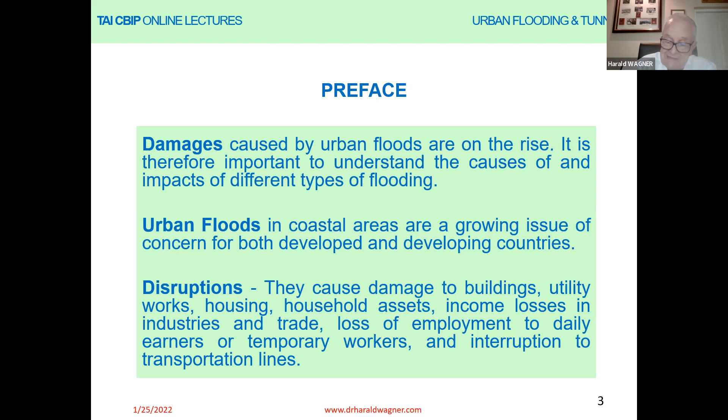That was an introductory note, and now I want to give you an overview of the content of today's online lecture, starting with some remarks on the largest city on our planet, and also how much oil production is influencing climate change. We all talk about climate change since the Paris Agreement in 2015, until 2021, when there was a big conference, almost 3 weeks, in Glasgow, Scotland.

Then I will talk about passengers and urban transport. I found a map of the cities which are in crisis in India, in crisis because of urban flooding, and its causes. Then I will go to one of the key experiences which I made here in Bangkok in the 2011 flood, which has affected Thailand.

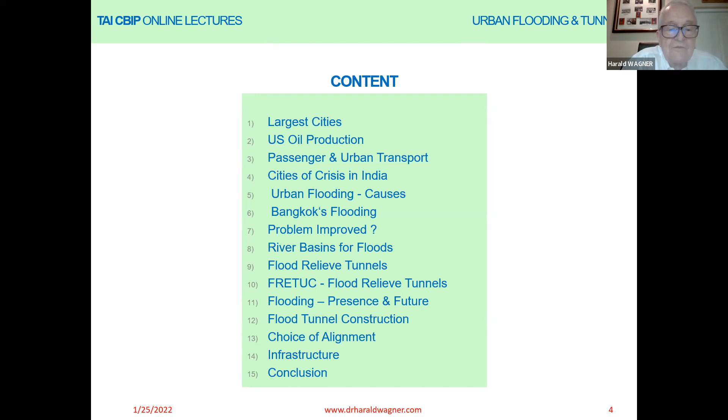Then I will talk in general about infrastructure, as flood tunnels and flood control in general are part of the infrastructure, and come up with some conclusions.

Now, if we take a look at the largest cities and urban agglomerations worldwide, we can see extremely growing populations in urban areas. Number one is Tokyo with almost 40 million people, then Delhi with some 25 million, Shanghai in China with 23 million, Mexico City with 21 million, almost the same as Sao Paulo in Brazil. Mumbai is also slightly over 21 million, like Osaka with 20 million, Beijing 20 million, New York with almost 19 million, and Cairo in Egypt with 18.5 million people. So these are the largest cities in the world, and also the largest areas with regard to growing urban population.

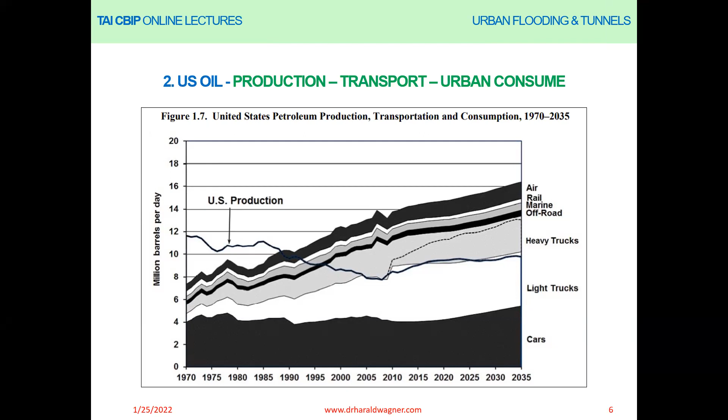So this is an overview where we can see how much this consumption has been affected in an urban context in the United States from transportation and consumption between 1970 and 2035, which is an extrapolation. We can go to the next slide.

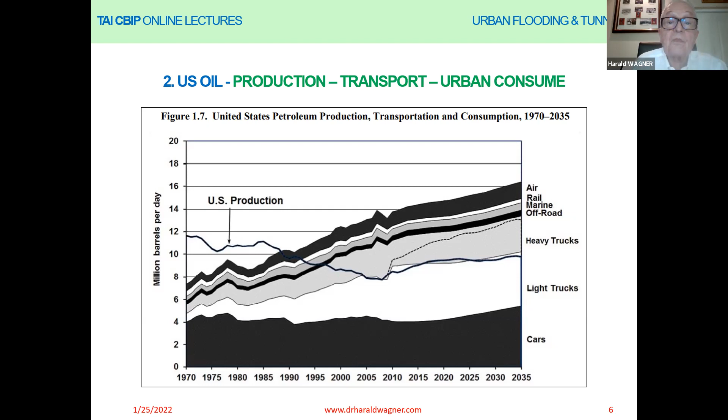The next slide gives us an idea about different types of traffic in urban transport and passengers per hour related to a 3.5 meter wide lane in the city.

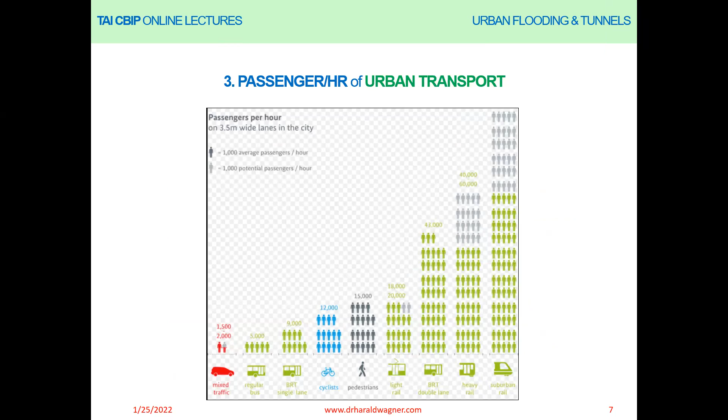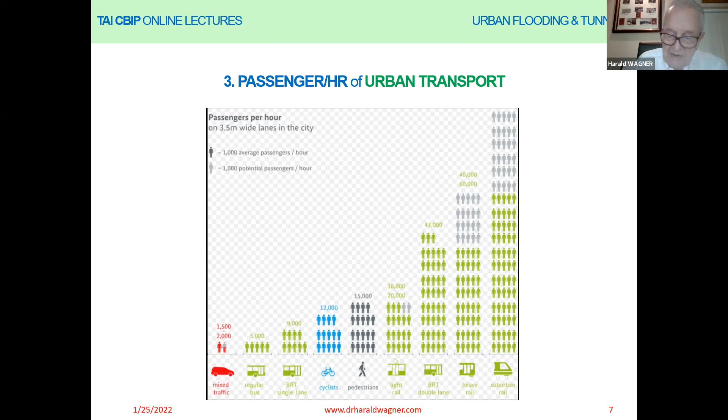We can see that suburban rail systems have increased most, with heavy rail between 40 and 60,000 passengers per hour, along with light rail, pedestrians and cyclists, and also mixed traffic, making up quite a heavy portion of the passengers per hour in our cities.

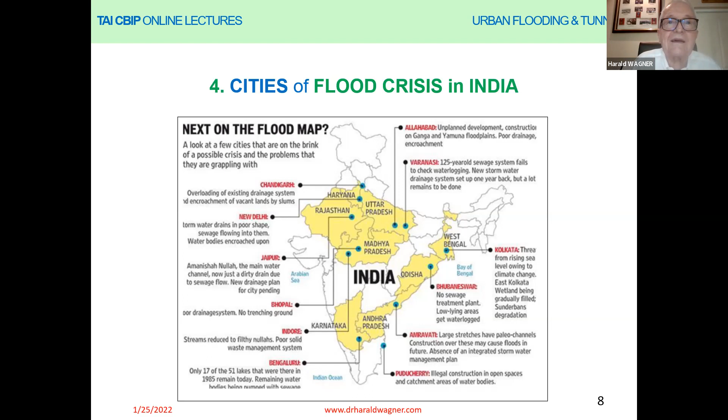We definitely have to understand what General Suresh Sharma said, that this is not a single place - it is a subject and a problem to be tackled on a much greater scale. Therefore there is definitely a need for more and deepening understanding and engineering, and this idea to go deeper and make another presentation is really a very good idea.

Now, what are the causes of urban floods? Urban floods have direct factors and indirect factors as causes. Part of the direct factors are climate change, change in weather patterns, and heavy rainfall. But urbanization is also a direct factor, with developments encroaching on floodplains and causing loss of natural storage, continued development and redevelopment to higher density land uses, and increased impervious areas such as roads, roofs, paving, and asphalt due to increasing development densities, which means more runoff.

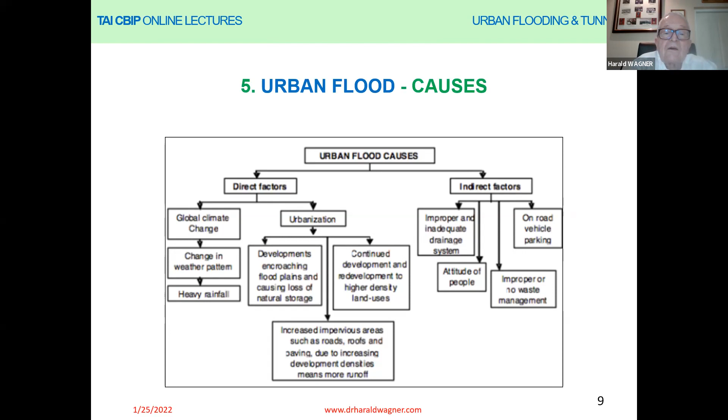Then we have indirect factors, with improper, inadequate drainage systems and on-road vehicle parking, which is another obstacle. There's also the attitude of the people and improper or no waste management, which is also a kind of indirect factor causing urban floods.

So when we go to the Bangkok flooding in 2017, Bangkok was hit heavily by heavy rain. The question is whether Bangkok will see major floods again or not. Despite horrible experiences in 2011, the city and country remain vulnerable to floods. So the question is also, who is to blame for that? Is it the people's garbage clogging the drainage system? We know this is a big problem. Is it the inefficiency of administrations?

Giant tunnels are drainage tunnels which are in construction or in preparation for construction. Some of them are being built, offering a sort of reservoir in the urban part of Bangkok, similar to what we have seen in Tokyo or in Chicago, where city administrations have been providing underground reservoirs and then managing these storage systems. Is this management responsible, and is this management going to be blamed?

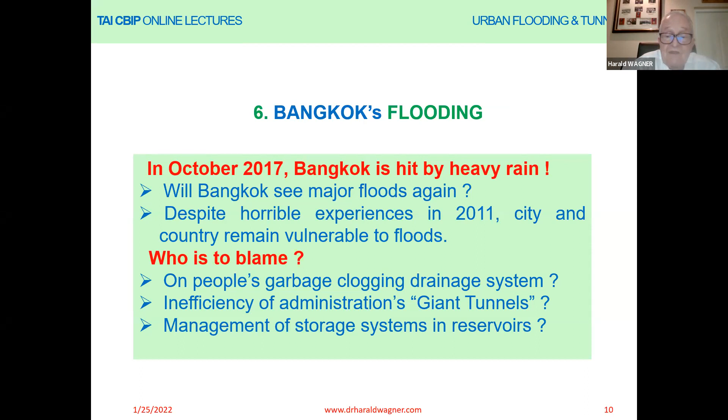This shows the actual situation in Bangkok in 2011 with urban flooding. You can see here that except the bridges, where people have been putting their cars to park, because Bangkok was not only flooded, but Bangkok was sinking also because of the flood. So this was a big problem, and this big problem still is not sufficiently tackled.

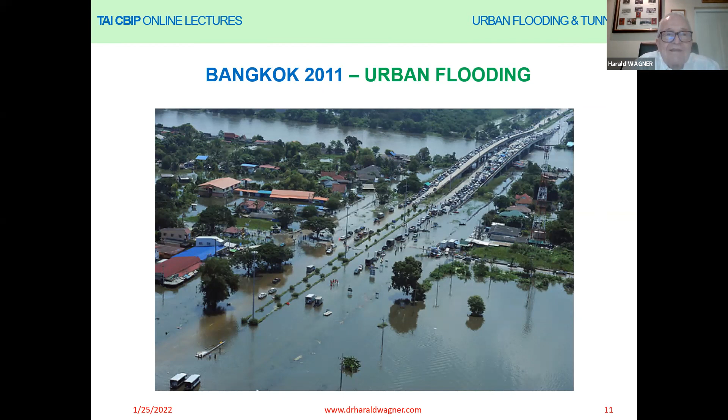So the question is, has the problem improved in the meantime? If we look at the cost of floods in 2011, it exceeded $47 billion. The question also is, why would the 2011 flood not be repeated in 2022? And what is the response of the Royal Irrigation Department? The Royal Irrigation Department handles these problems and deals with all irrigation issues in Thailand. The whole country is under control of the so-called RID, Royal Irrigation Department.

So what happens when the large-scale reservoirs are full? What happens if they are not full? The water runoff in Nakhon Sawan was 43% less in 2021 than in 2011. And in 2021, the accumulated rainfall was also less than in 2011. This gives the Royal Irrigation Department some comfortable feeling, telling the population, don't worry, we don't have this serious problem right now because of the runoff of the Nakhon Sawan River, and also because of less rainfall.

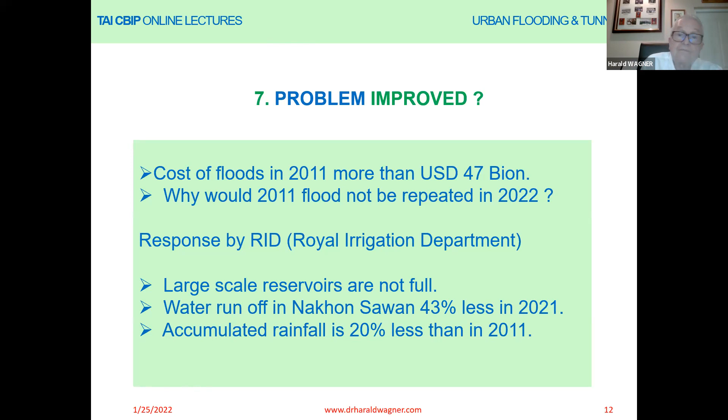So if we make a flood review and analysis, we have to state that there is hardship and damage during the prolonged and widespread deluge, followed by seemingly long-term and sustainable grand elaborated plans and proposals. There are various views of the problem. First of all, there is less natural disaster right now than there has been. It is more a case of mismanaged water resources.

Another view is that numerous prescriptions of what should be done exist, but are not followed, even though they exist on paper. Then there are committees to study solutions and develop recommendations for the various aspects of the problem. There are also ambitious ideas, for instance new floodways, dredging canals, and so on. And there are streamlining laws and agencies for water management, which are involved and responsible for floods.

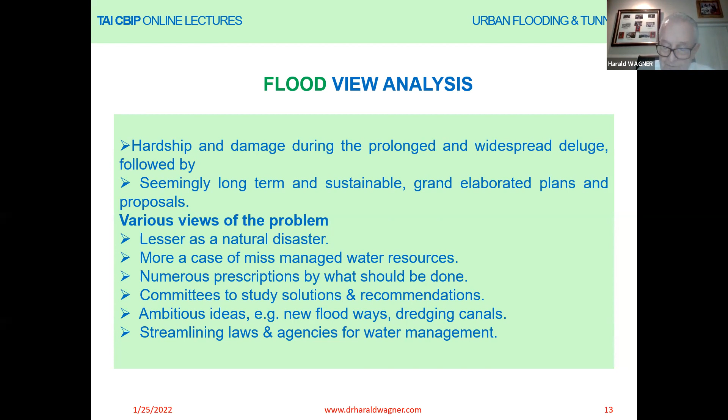So how do we protect against flooding? In this picture, you can see an activist from the community in the flooded Chatuchak district in Bangkok, who set up a large barrier of sandbags along with pumps in an attempt to protect the Moo Baan Kredkaew housing development from being inundated in 2011.

We have seen last year in Germany also huge floods in the summertime, and even in highly developed Germany, sandbags have been the immediate assistance or immediate help to get a little bit of improvement on the problem.

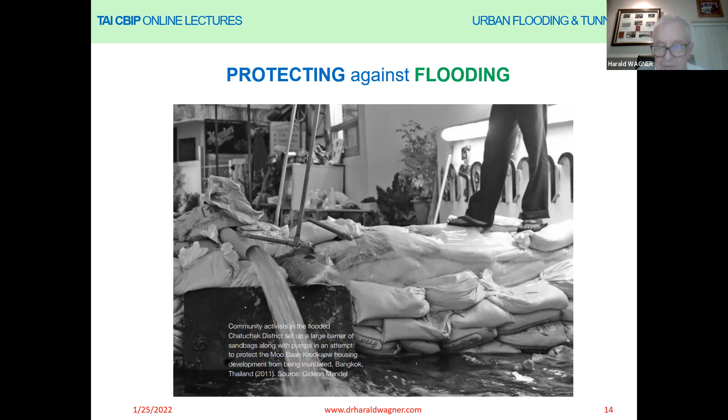There are attempts to establish a floodwater research institute, which should become an authority to manage water resources, embedded in some 50 different laws and involving 30 state agencies and 7 ministries. None of the laws authorizes diverting water for different usage. None deals really with flood management, even if it is called a Floodwater Institute. And there's a plan to set up a water ministry to consolidate all agencies, but this plan never got off the ground. So still, it is what is sometimes called a paper tiger.

There are other views of the problem, in particular doubts about the efficiency of the giant drainage tunnels, which are projects currently under construction here in Thailand. Then there are views also with regard to a proper flood warning system. This flood warning system may be something that is going to be improved and may give real help in regard to software development for flood warning systems, and with that may also help improve the flood warning installations, not only the systems but also the installation.

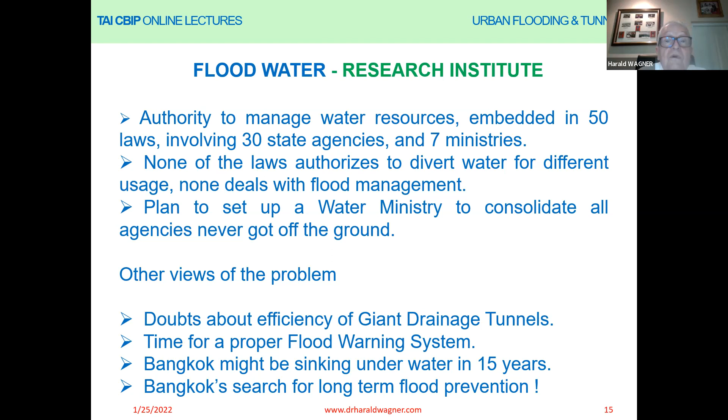Bangkok has had several severe floods. Just to mention the most recent ones, there was a severe flood in 1942 - that is almost 80 years ago. In 1983 and also in 1995, all of central Thailand has been flooded, in addition to 2011.

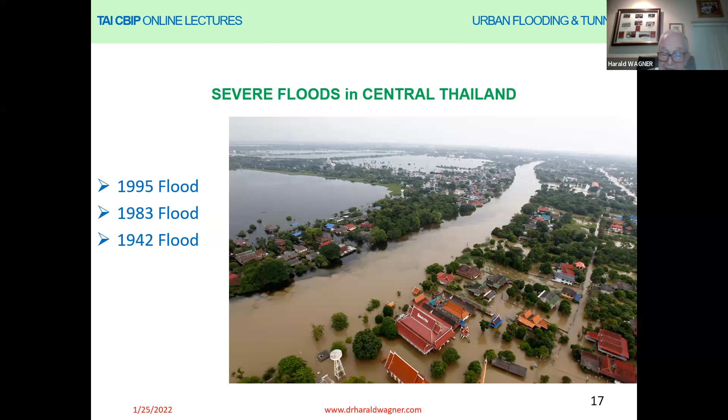When there is flooding, then there is also subsidence, and subsidence or settlement of structures must be controlled. This land subsidence in Greater Bangkok is witnessed by widespread exploitation of groundwater extraction, leading to significant land subsidence and damaging of urban infrastructure.

Another example of what you see here on the right side of this slide is the sinking of the roads. Lots of transportation infrastructure in Bangkok and Thailand is elevated, and these elevated viaducts are located and situated on deep piles, in the range of exceeding 25 meters, sometimes 30, 35 meter deep piles. Even though these piles are keeping the viaducts in place, the land, like you can see on this footpath here, adjacent to the deep pile foundations is subsiding.

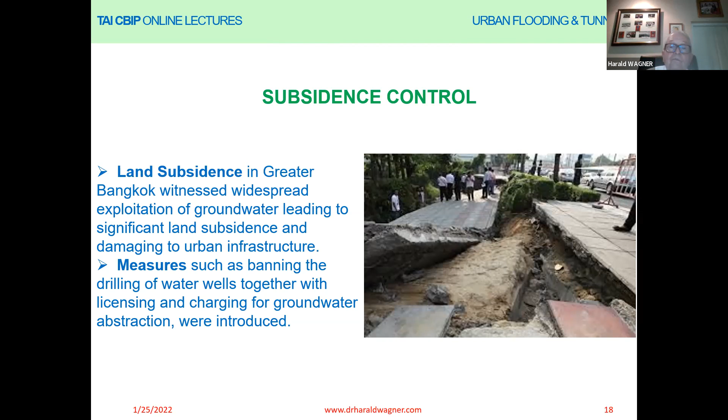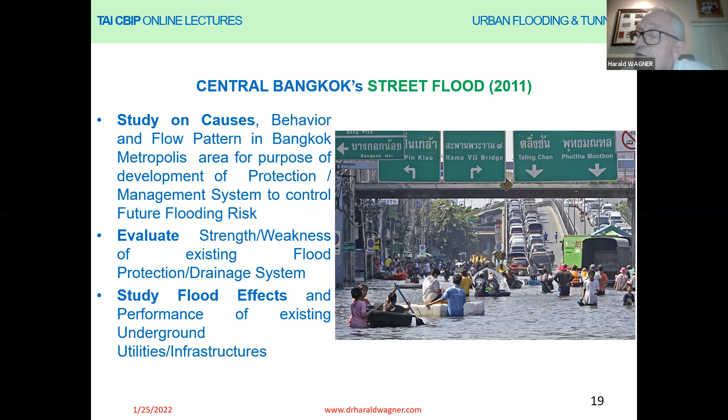So the study on the causes did show that the behavior and flow pattern in the Bangkok metropolitan area, for the purpose of developing protection and management systems to control future flooding risk, has been analyzed. However, evaluation of the strength and weakness of the existing flood protection and drainage system has been done, but has not sufficiently solved the problem. The study of the flood effects and performance of existing underground utilities and infrastructure has also been performed. Lots of studies have been produced, and that all contributes to the overall flood control policy developed so far.

Now let's talk a little bit about the groundwater nexus, about the connection of flooding and how this is to be seen in the context of the groundwater.

The groundwater pricing mechanism, which has been introduced in Bangkok, is considered to be a success. Charges were slowly increased until 2003, then exponentially increased after 2003. An additional charge for groundwater preservation was introduced in 2004, and now groundwater is more expensive than water from the piped public supply.

It is a combined pricing, developed for the public water, and it has been reduced from 2000 to 2005, from 2,700 million liters per day to 1,500 million liters per day.

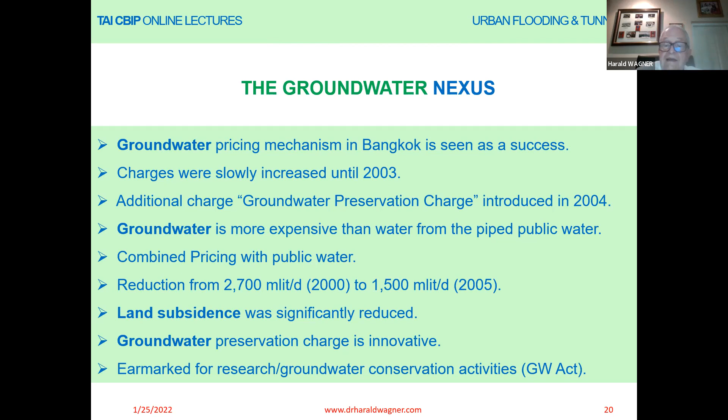And land subsidence has been significantly reduced; it was worse before. The groundwater preservation charge is considered to be a political innovation, earmarked for research and groundwater conservation activities under the so-called Groundwater Act.

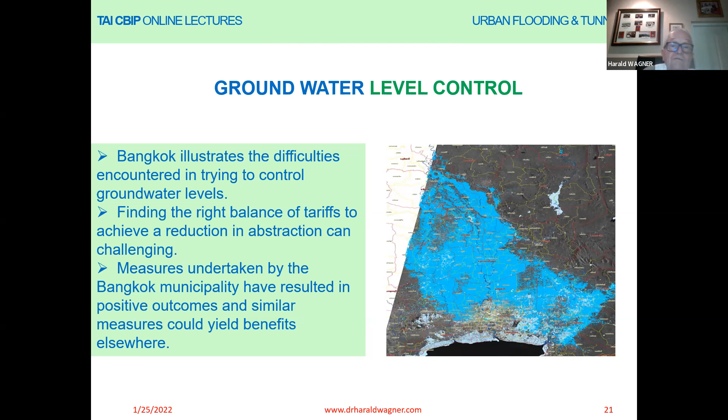These challenges, and the measures undertaken by the Bangkok municipality, have resulted in positive outcomes, and similar measures could yield benefits elsewhere. So it has been used as an example for improving practices.

Basically, the Bangkok area is the result of river sand and silt transportation, covering the whole basin of Bangkok. The bedrock is 300 meters deep, so everything above the bedrock consists of different layers of sand and silt with different permeabilities.

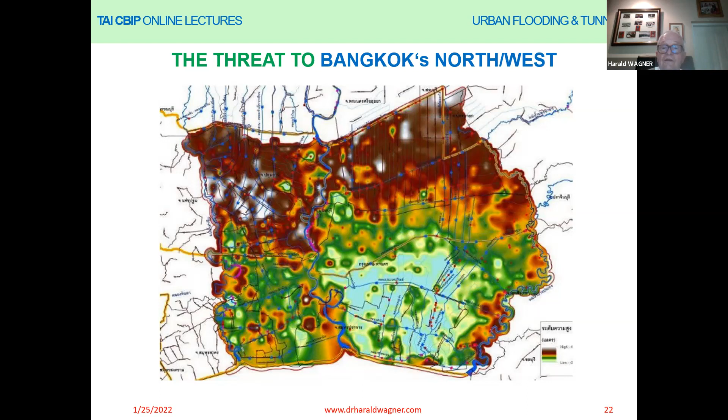These layers are all interconnected with each other. So the whole area has a groundwater level close to the surface, with just a little difference of a few meters between different areas of the city.

So how is the disaster spread? You can see here there are two arrows in the upper part of the slide, showing the Bang Sai and Wang Noi area, where in the center we have the Chao Phraya River, and we have another river, the Tha Chin, on the left side.

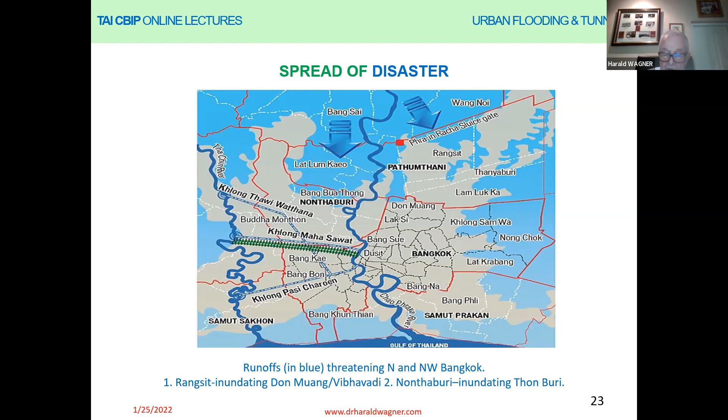We can see how the disaster spread in terms of the blue colored areas, where inundation happened in the Don Muang Vibhavadi area, where we have the old Bangkok airport, and the Nonthaburi area, another inundated area on the left side. So Nonthaburi, Samut Prakan, and Samut Sakhon are the areas heavily flooded during the 2011 flood.

The question is, what are the estimated losses from the 2011 flood? An estimate was done by Thammasat University, a well-recognized university here in Thailand. It is estimated that the loss reached up to 1 trillion Thai baht, with a conservative cost estimate being between 420 and 600 billion.

Now, how much is 600 billion? 600 billion baht is about 20 billion US dollars, just roughly 20 billion US dollars.

The National Economic and Social Development Board also did an estimation of the flood, and this estimation was on the conservative side, about 300 billion Thai baht, or 10 billion US dollars. But the World Bank also did a cost estimate, done by very experienced people, and they estimated more than Thammasat and more than the National Economic and Social Development Board.

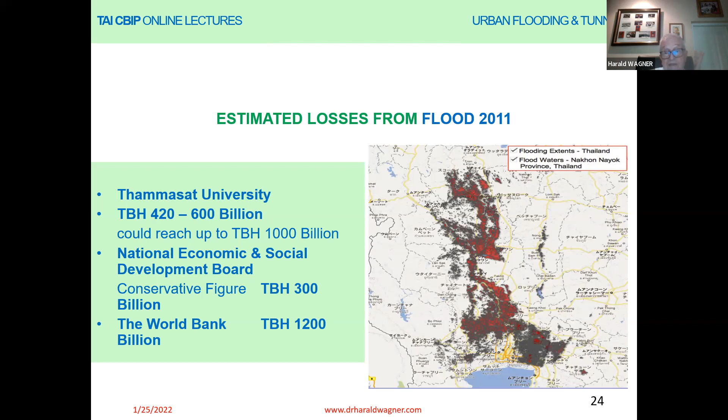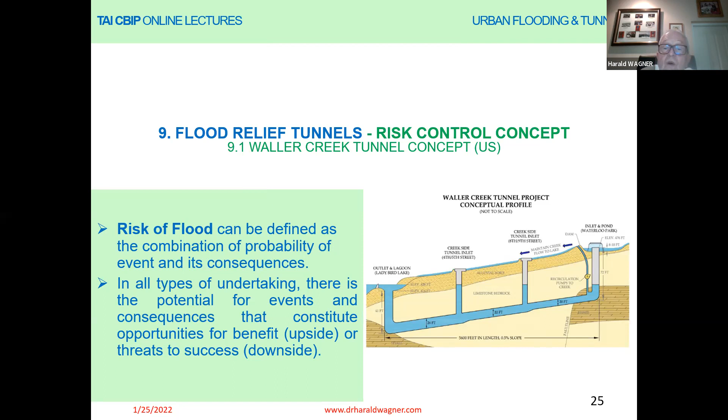So this is enough to get the water, if the water is increasing and development is a threat, then this would be okay to have this flood control tunnel type for the Waller Creek project in the United States.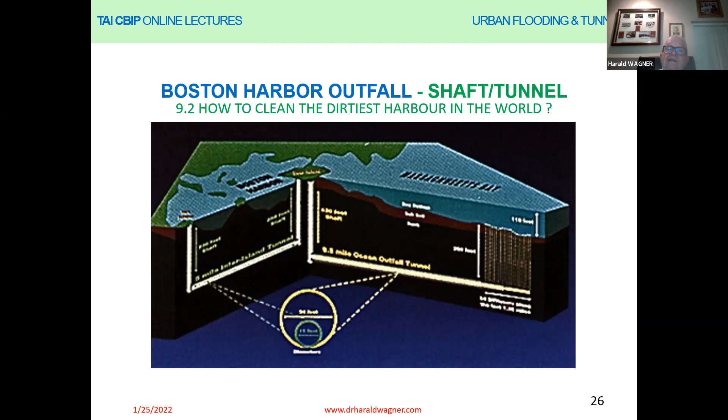There is another concept which directly relates to the Boston Outfall tunnel, which is the FRETUC water distribution concept. It is a concept actually implemented at Lake Michigan in Chicago. The water enters through the filtration plant into the filtration system, and in the filtration system it is distributed into the infrastructure in different parts of the city.

So there is the water distribution concept 1, where we pump flood water through the outfall tunnels. It is using diffuser caps for distribution into the sea or into the city, and it keeps Bangkok dry during floods in the future. Then we have the second water distribution concept, where we refill the aquifers later via

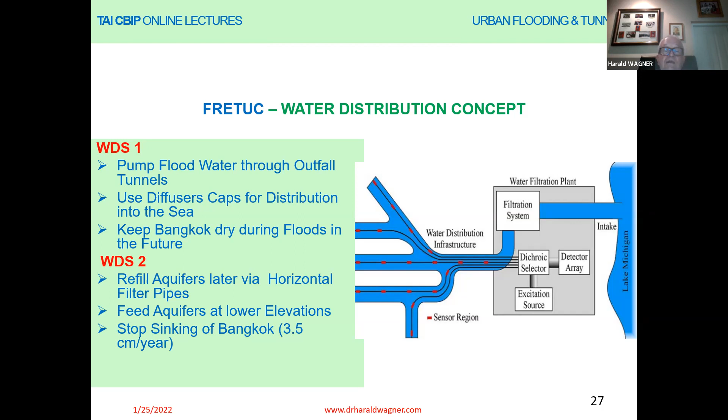horizontal filter pipes and feed the aquifers at a lower elevation. In that regard, the result will be that the sinking of Bangkok, with up to 3.5 centimeters per year, will be stopped. So that is this water distribution concept, which is implemented at Lake Michigan in Chicago.

Now, a flood relief tunnel is a win-win infrastructure for flood prevention. It offers hydro energy production, upgrading infrastructures in development of coastal areas. It also makes the water flow towards the same level in two pipes, as there are differences in specific weights.

We have the fresh water and we have the salt water, and there is a difference in the specific weight, where the fresh water always wants to go on top of the salt water because of the lesser weight. Coastal areas are all prone to floods, which is feasible to make use of flood fresh water from the rivers. If there is a waterhead and if the water flows, there is a waterhead, and this is a potential for energy gaining, for energy production.

The fresh water is directed into the sea, which is salt water, from the intake shaft through the inclined tunnel. You can see this scheme, which is the connection between Ayutthaya, the former capital of Thailand, and Bangkok. There is a shaft in the area of Ayutthaya. The depth of the shaft is estimated at about

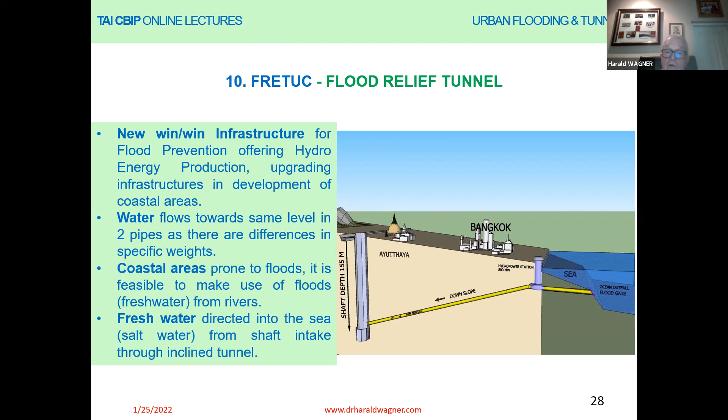Now, the flood relief tunnel concept is as it has been done for the Boston Outfall Tunnel. The picture shows the lowering of one of the vehicles which have been used in the tunnel. It was a big tunnel with 8.5 meter diameter inner diameter, precast concrete segmental lined tunnel. Geology has been almost uniform soft ground, clays and sands, comparable with the geotechnical conditions in the underground of Bangkok.

Groundwater is near the surface. Location is north of Ayutthaya at the confluence of 3 rivers. Diameter of the shaft up to 25 meters and the depth about 150 meters. So these are preliminary conceptual design phase.

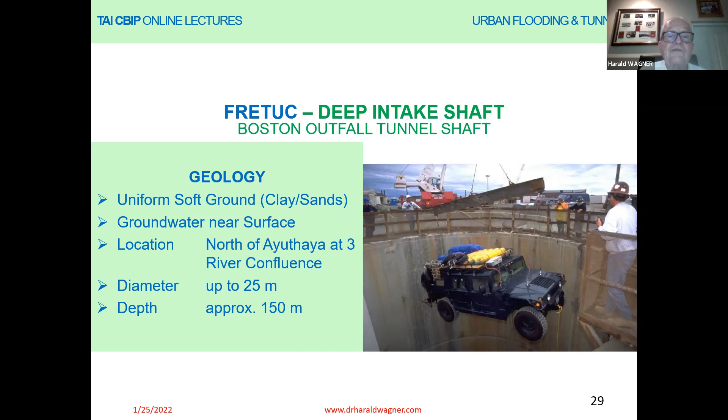The outfall tunnel has intermediate shafts. Its length could be about 100 kilometers, instead of Boston's 16 kilometers. The length of the outfall tunnel for Bangkok would be much longer, with a diameter of approximately 10 meters inner diameter, and a slope of 1 by 1,000.

The discharge is approximately 7,000 cubic meters per second, which is the maximum discharge of the Chao Phraya River. The actual discharge of the Chao Phraya River is in the range of 2,500 cubic meters per second, with a water head of 155 meters, exactly the same as the depth of the intake shaft, and the hydraulic data needs some more evaluation and confirmation.

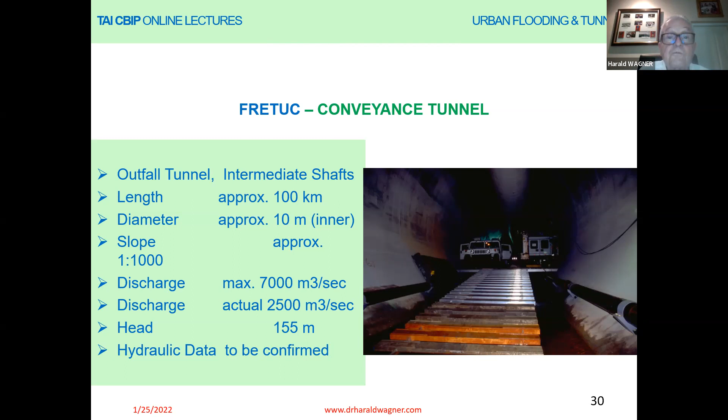The flood relief tunnel concept is a very simple concept, also called the KISS solution: build the tunnels and pump the water into them. Build 2 water distribution systems, which we have seen as system 1 and 2, and build a hydroelectric power plant between 800 and 1,600 megawatt, which is quite a big hydropower station, because it can use 150 meters of water head.

The new concept is called FRETUC, and it is able to solve Bangkok's 3 main problems: the hydraulic problem, the geotechnical problem, and the financial problem. Bangkok, being the capital of Thailand, would be saved from flooding within less than 5 years at costs of approximately $3 billion, with the hydropower generating revenues and a return on investment in less than 10 years.

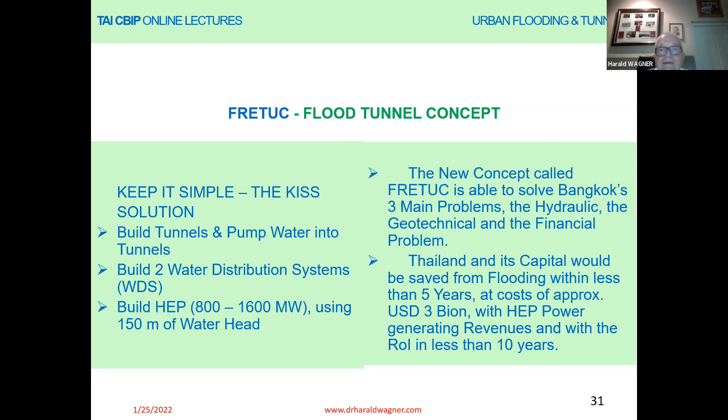So that is quite an attractive opportunity to not only get control over the flood and the risk of flooding, but also to get the invested money and the return of that money within reasonable time.

So what are the issues of risk management of floods? First, the water resource management. Second, the river basin flood engineering and management. Third, the urban flood engineering management, coastal flood engineering management, and flood protection engineering management, as well as flood prevention schemes and systems, integrated flood disaster mitigation, prevention of flood and preparedness for floods, and flood relief and rehabilitation. So these are all risk management issues with regards to flood.

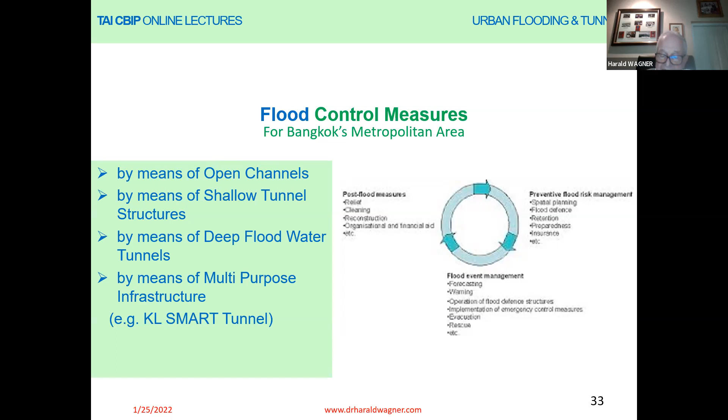For the metropolitan area of Bangkok, the flood control measures are managed right now by means of open channels, shallow tunnel structures, deep flood water tunnels, and multi-purpose infrastructure. I would like to touch on the issue of Kuala Lumpur in Malaysia and their unique and innovative smart tunnel concept. This slide also shows preventive flood risk management, flood event management, and post-flood measures. All this management is in a cycle, a cycle condition, and has to be considered as such.

The salient features of a hydropower project on the Chao Phraya River: the hydroelectric power station would have a capacity of approximately 800 megawatt, with estimated revenues of 240 million per year, a return on investment within 10 years, and financing attractive both to the World Bank and to the International Finance Corporation, IFC.

With rough details of the investment: for the tunnel, approximately $1 billion (1,000 million); for the shaft, about $50 million; for the powerhouse, about $250 million; for the equipment, estimated at $200 million. So the total will be about $1.5 billion US, or 45 billion Thai baht.

We also have to look into the goals of the flood tunnels with respect to environment. It drives the demand for infrastructure, such as demographic change and economic growth, and must be coupled with an appreciation of the goals it strives to achieve, such as providing access through efficient system performance, safety, equity, sustainability, and resilience, and the conditions that drive infrastructure supply, such as financial and energy resources, governance, institutional capacity, and innovation. So all these are goals under one roof, under the roof of flood tunnel implementation.

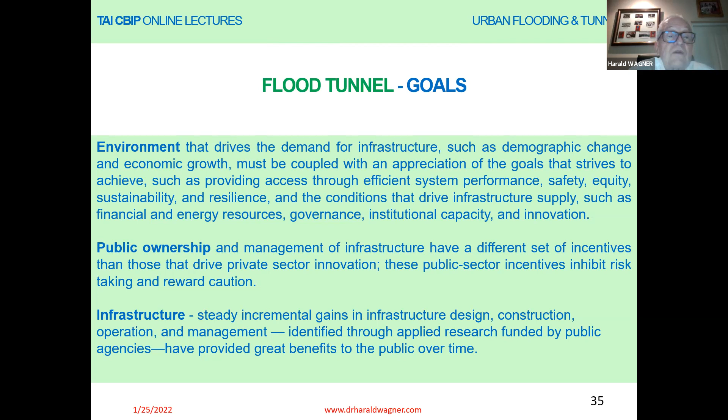From the point of view of infrastructure, there are steady incremental gains in infrastructure design, construction, operation, and management, identified through applied research funded by public agencies, which have provided great benefits to the public over time. These are benefits we get from the infrastructure implementation of flood tunnels, and gains for the environment.

In such a project, we have to make a so-called plausibility check. We cannot only say we do a fascinating project; we also want to know the plausibility. The plausibility has to be made with the initial documents, and these documents are passed on without checks. Any efforts are meaningless if we do not check. We have to check and find out whether it is plausible or not.

The amount of papers produced is no guarantee for quality. We can produce a lot of papers, but plausibility is above all. The software application for recording only makes sense if recordings are checked for correctness and plausibility. The contractor and supervisor of a flood control project has to take time and know how to make the necessary checks. So what we can see here is a project in difficult ground conditions, using a conventional support system for implementation - this is a project in Bangkok.

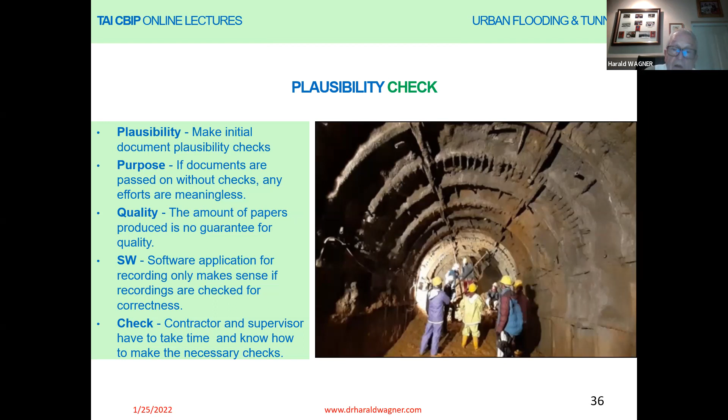So let's talk about the present and future of flooding. Modern urban tunnels are challenged by the request to strengthen engineering capabilities using innovative technologies in project delivery and quality management. Innovation is the driver, and we need to understand not only what innovations have been developed in the past and where we are today, but that the future needs further innovation and improvement - because tunneling is the art of uncertainties. It's an art where we are challenged every time we have a new tunnel. There is no tunnel twice the same in the world, and that gives us a field for innovation and improvement.

There is a future need for understanding and effectively mitigating risks and hazards in underground works by all stakeholders, which requires professional planning of underground networks to enable and safeguard future expansion and extension of infrastructure projects. We all understand this in the Tunneling Association of India, and under the roof of the Central Board of Irrigation and Power, we have a new developing world every year, because the expansion of underground infrastructure continues and gives us a lot of ideas and incentives for improvements and for meeting challenges in the future.

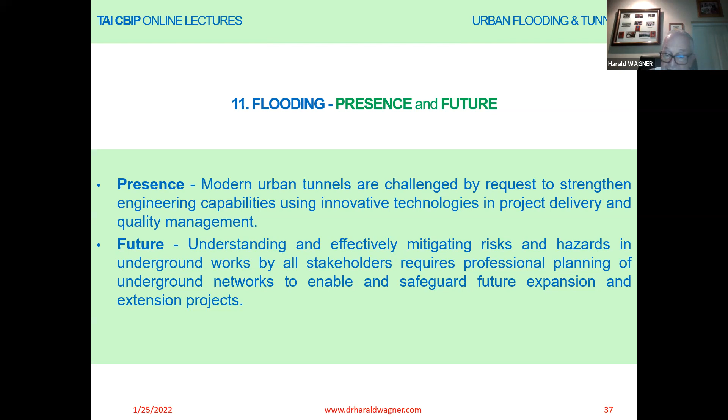How does the International Tunneling Association view flood tunnels? It views flood tunnels from the point of view that underground networks and extension have a special emphasis on advantages provided by interactive communications with the International Tunneling and Underground Space Association. The benefit, regardless of the technology applied - whether conventional, mechanized, or hybrid - is that any tunnel contract today benefits from carefully performed ground investigations.

We have had a very interesting lecture on ground investigation, which is part of the book that is going to be launched - I will talk about that a little later - resulting in geotechnical baseline reports together with risk management plans, recognized and supported by all project stakeholders. That is the view of the International Tunneling Association, that all stakeholders are included.

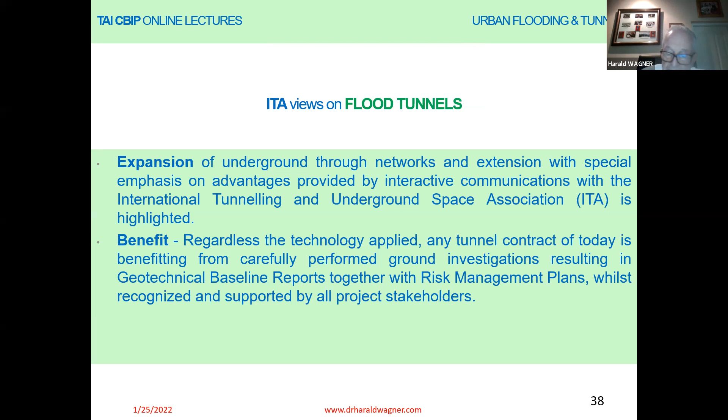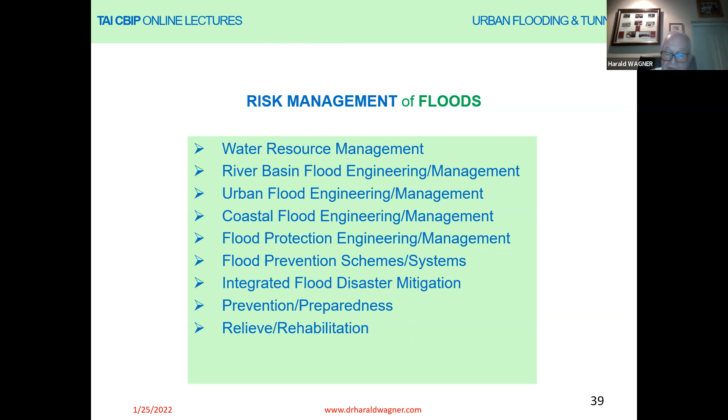Now, risk management of floods. We have different types of risk management, from resource water through the river basin origin, urban flood, coastal flood, flood protection, prevention, disaster mitigation, preparedness, and flood relief and rehabilitation. So flood tunnel construction is basically to be seen from the point of view of analysis through data collection, through monitoring, until we finally come to the tunnel boring machine.

In this case, the slide shows you a tunnel boring machine and its parameters. We start with different clients at real-time analysis and system behavior analysis, then go to the Procon database, where we look into ground and TBM parameters and geotechnical monitoring, building the basis on excavation and data collection and transfer via internet for immediate analysis.

So from the point of view of ground, we have expected ground conditions in the tender document, which actually include the geotechnical baseline report.

Then we have, after the expected ground, what is the actually encountered ground? What is the ground strength? What is the permeability, the groundwater inflow? What are the fault zones, fracturing, karst, and this type of information which goes directly from the ground.

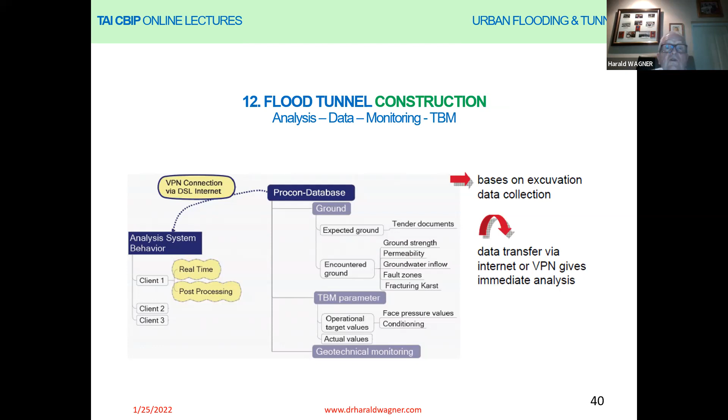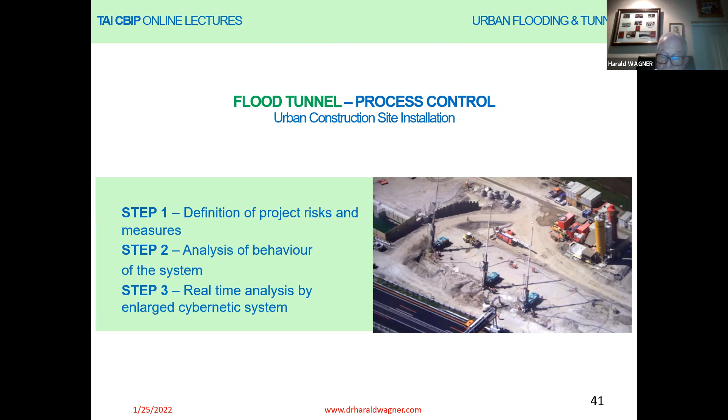and the actual conditions. In an urban construction site installation, we always have to look into 3 steps. First step is the definition of the project risk and the mitigation measures. The second step is the analysis of the ground behavior of the system. And the third step is the real-time analysis by using enlarged cybernetic systems. So this is the process control for flood control in an urban construction site.

We have different design phases. We have the project preparation phase, and we have the general design phase, where the project preparation is arguing and documenting motivation for the project, defining and documenting objectives of the project, establishing a reliable base for the follow-up steps. And then the general design is to apply the so-called modular structure of the design, then to adapt the flexible approach for

different project types. For instance, for a new railway line, what is the railway station? What is the upgrade of the existing infrastructure? So there are different approaches and it needs flexibility. And also to specify the process tailored to specific requirements of the individual projects.

So the general design includes feasibility study, conceptual design, then preliminary design, study of alternatives, and the preparation for the permit application to start finally with the construction.

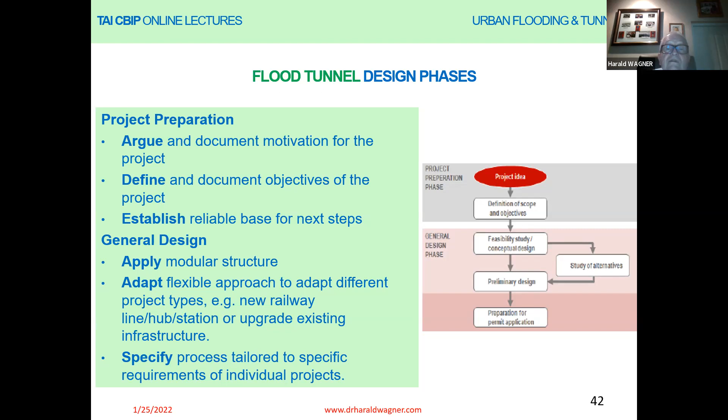Far-sighted design is a very important one, and what we can see here is a cross-section, schematic cross-section of a tunnel which includes a stormwater tunnel and a two-deck roadway tunnel. So this is a far-sighted design because a feedback to previous phase is required if a solution is unacceptable. The legal requirements, if they are not applicable, then it will damage the project.

The success factors, however, are a broad, holistic approach to be applied and the relevant critical aspects focused on, and the coordination of the specifications for the data collection and for the requirements for decision making.

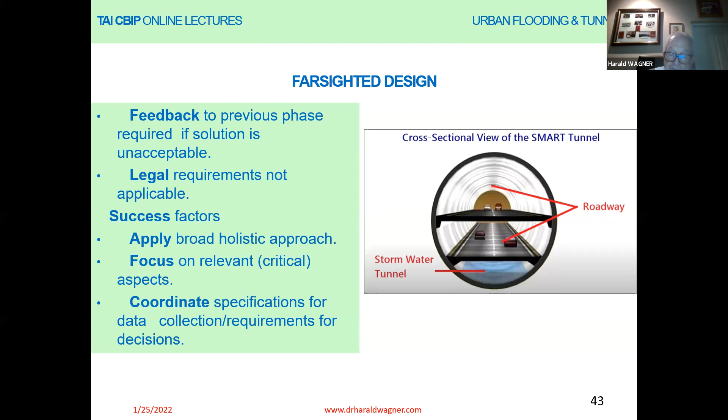This is again Kuala Lumpur's smart tunnel, and it has 3 modes, where we have mode number 1, if there is no storm condition, and on both decks of the tunnel we have traffic. Then we have the mode with most storms, which happens 7 to 10 times a year, where we have the tunnel decks in both directions with the traffic, but underneath we have the ground, we have the storm water.

And then we have the major storms, which are annual events in mode number 3, where we have the tunnel completely filled with water, and where from the intake to the outlet at the lower part of the tunnel, everything is full with water.

This goes back to the feasibility study and the conceptual design. It has been addressing international topics. It also has been discussing alternatives. It has been evaluating requirements from the point of view of what capacity do we need, what is the traffic load, and what is the water load also.

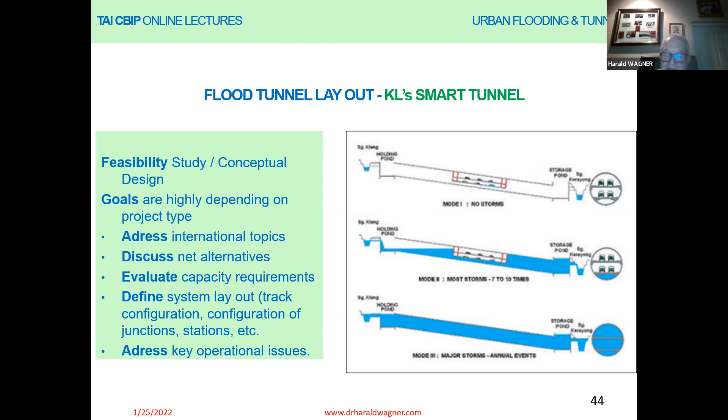Then it has to define the system layout with the track configuration, the configuration of the junctions, intake and outtake, entrance and exit, and so on. And then it has to address key operational issues. All this is a comprehensive approach for the design.

This choice of alignment is something which is very, very important and has to be done every time we have a tunnel. So we have to develop alternatives and then evaluate the alternatives against the project goals and come up with the best solution. Compare the alternatives in a multidisciplinary approach and then come up with the selection of the best

solution. This slide shows you different types of depths under a river, where the depth below or under a lake, the depth below the surface between 45 and 50 meters would allow to look into a tunnel technology which is known as the immersed tube tunnel.

Then if we go deeper, with regard to 85 to 90 meters under the superficial sediments, we may come up with, instead of immersed tube, Mixshield TBMs. And if we go further and further deep, 150 to 180 meters, where we have soil conditions like molasse, then maybe an open shield TBM may be the best solution.

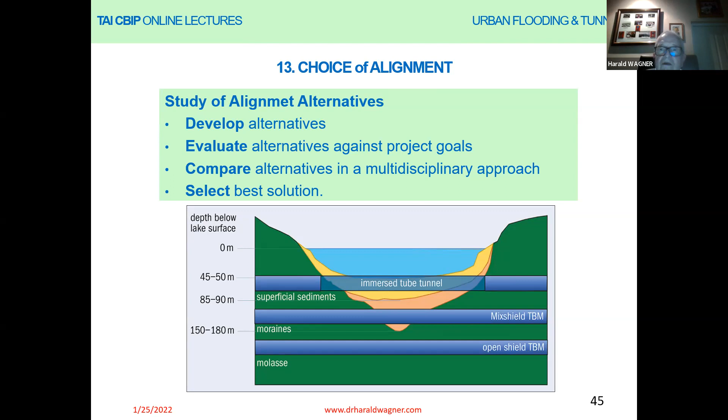So we have to decide about details, and after we have done some alternative alignment studies, we come up to the preliminary design, where we define technical features for a rail project in much more detail. We develop secondary structures and protective measures, which consequently follow infrastructure projects. Then we execute project optimization to maximize the benefits and minimize the effects on the environment.

For instance, there is a project where I have been involved in Nepal close to India. The 31 billion rupee Melamchi project took more than two decades to start distributing water to Kathmandu, the capital of Nepal. The flood has now pushed back this project's development. According to the project chief, no one had imagined there would be a flood of this scale. It's an unimaginable disaster, as Ram Kumar Shrestha said about this. In the picture, you can see what happened last year, that this project has been heavily affected by the flood in the middle of the year.

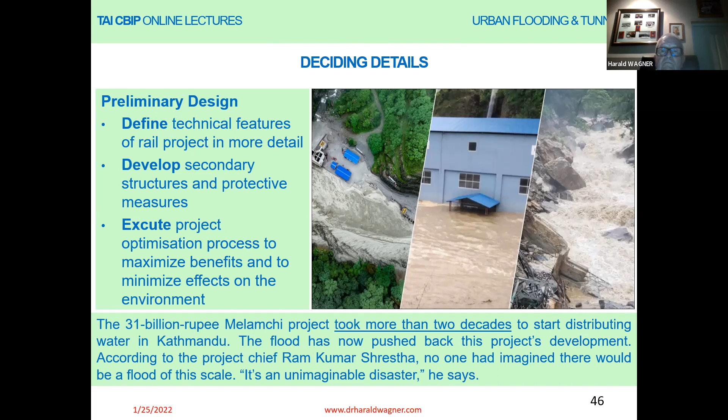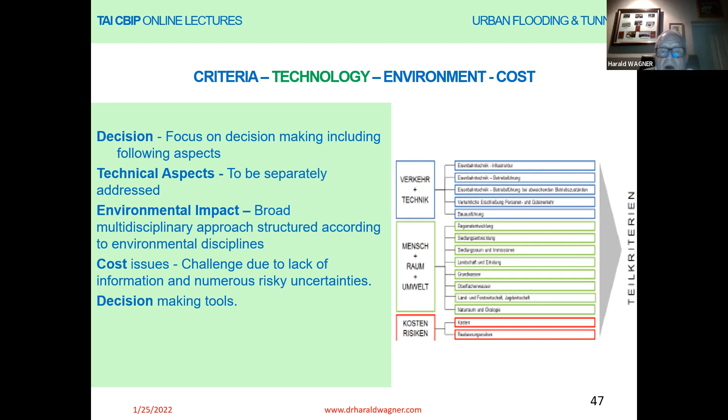So we have to decide on details in order to make structures, even secondary structures, flood protected. We have to define criteria and technology and environmental and cost from different points of view. For the decision, we have to focus on following aspects: technical aspects, which we address separately from environmental impact, where we have a broad multidisciplinary approach structured according to environmental disciplines, and the cost issue, which is a challenge due to lack of information and numerous risky uncertainties. Altogether, it's making the decision tools for traffic and transport, technology, for humans, for environment, and for the risk of cost.

For the risk of cost, we want to understand the controllability of cost. We have a maximum controllability of cost at the beginning when we do the route selection. Then if we go into the pre-design phase, the controllability declines. Then we come into the phase of permission, it further declines in the direction of the detailed design, and finally in construction we have a relatively least controllability of the cost.

Challenges for cost estimates are very much in the early design phase. It is incomplete and project knowledge is not complete. There are uncertainties, a high level of uncertainties in the basic data for construction cost estimate, and for specific cost estimate we have another additional approach which is required, and then for the application of adds on basic costs at several levels of the cost estimate process.

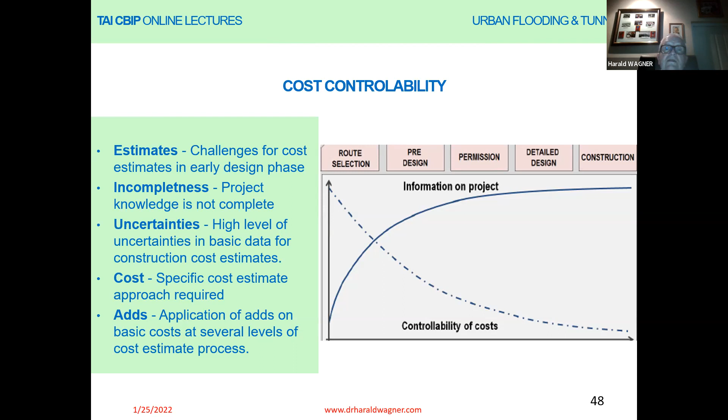So all this is to be seen in regard to the development of the project. We have risk controllability also. Reducing the risk then involves a set of measures contributing individually to risk reduction. What is helping most at this stage is a risk management plan. Upon adopting the measures, there might remain a residual risk always, and we should keep that in mind, that as long as the project is in construction, nothing is final.

The flood risk management requires the holistic development of a long-term strategy, balancing current needs with future sustainability. An integrated strategy usually requires the use of both structural and non-structural solutions. So with that regard, we always have to look into the components, and we have to recognize the existing risks and likely future changes, which is crucial.

Now, infrastructure consists of investment, innovation in many cases, consequences, and side effects. The public investment in research and human capital development has yielded many benefits and has never been as important as it is today. But whether and how it can be sustained remains in many cases an open question. The remarkable degree of innovation in infrastructure and efforts to meet the great challenges of disruptive technological changes and climate change are resulting in natural experiments. So therefore, I call it always, every project, in particular flood control projects, are unique projects.

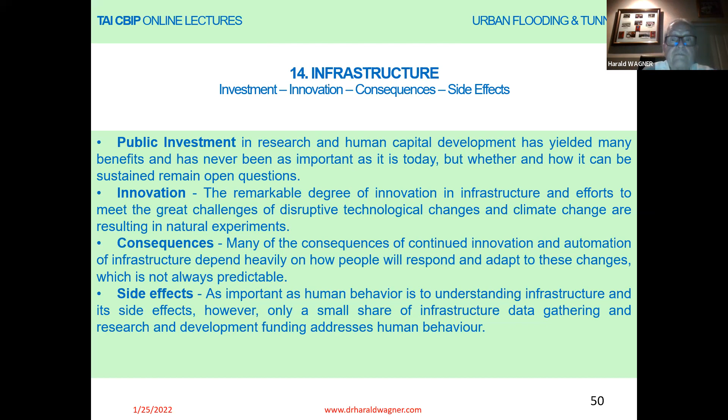robust design and robust projects. In summary, with regard to urban floods and flood tunnels, like other infrastructure projects, they have been plagued by cost and time overruns that deviate significantly from their value. The problems might be caused by administrative issues, by geological and geotechnical investigations, maybe by insufficient or poor engineering, and inefficient design. Flood infrastructure requires a high safety standard and is essential for urban area networks. Flood tunnels, when compared with other infrastructures, have a high degree of safety, strengthening the resilience and sustainability of a flood project.

To support the planning of operators from the safety point of view, a comprehensive risk assessment will always be used. Risk assessment in tunnel engineering shall be derived to ensure high safety levels when implementing changes in existing infrastructures. A simple and effective method of risk allocation in construction contracts to better control risk must include a geotechnical baseline report in contract documents in order to allocate the risk. The geotechnical baseline report is a contract tool for owners and contractors, providing the ability to define the level of geotechnical risk and financial consequences. In addition, there are ITA guidelines for the preparation of geotechnical baseline reports and considerable international experience.

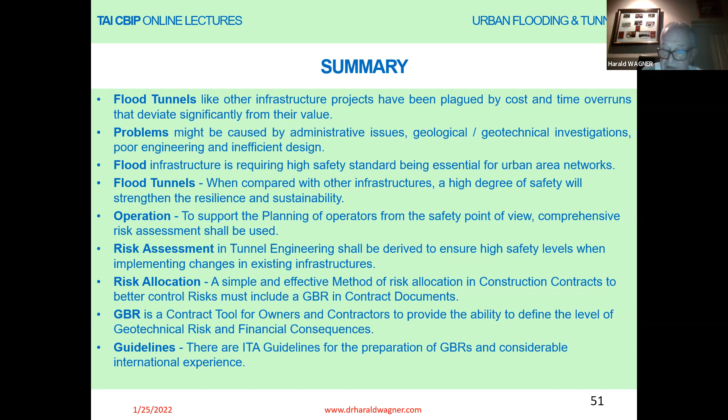In conclusion, the demand for properly developed flood tunnels has been continuously growing. Intensification of networks shall provide better communication between regions and sometimes even countries and continents, with alignments corresponding to the demand of shortening operation times in response to sustainable and resilient requirements. Conventional tunneling methods, as well as mechanized TBM tunneling, are well suited for flood tunnels in increasingly difficult, complex, and changing geological, geotechnical, and contractual conditions.

Innovative concepts, like the one I explained with the FRETUC flood relief tunnel concept, are required to address sea level rise, climate change, and subsidence. The main purpose remains minimizing overall construction time and cost, minimizing cost by selecting the best suitable advanced flood tunnel contract conditions based on the FIDIC Emerald Book, the new FIDIC book launched in 2019 at WTC in Naples, and optimizing the driving cross-section, alignment, and lining methods during design and construction.

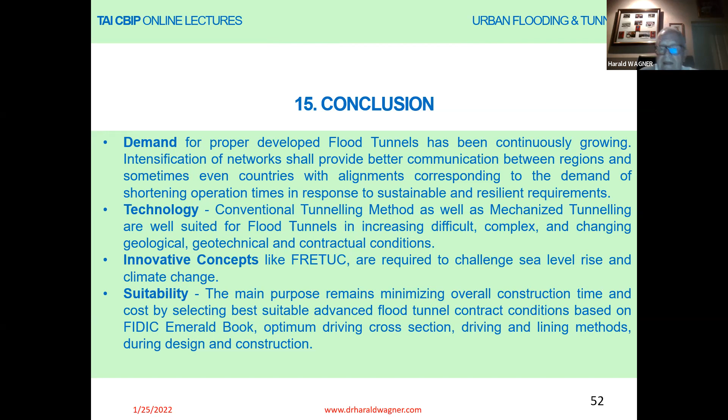But this is only one thing. If we go into further details of protecting urban areas from flooding, then a lot of other measures may also be relevant in this context. But it was just a short notice which I have received, and I think it is very worthwhile and very interesting to follow up on this.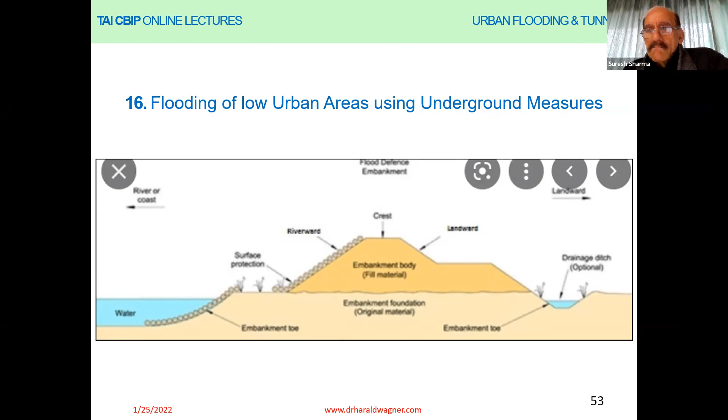Professor Wagner has covered a lot of ground, including the social and environmental aspects. He's drawn his examples primarily from where he's stationed now, that is Bangkok. He's also given some examples from the US and also the smart multi-purpose tunnel from Kuala Lumpur.

Now, what essentially comes out is that tunneling is an effective solution in the urban environment to avoid flooding. Whatever methodology you use, whether a shallow tunnel or a deep tunnel, you have to have multiple shafts, and preferably a deep tunnel running at a gradient with the water outflow getting discharged into a lake, a water body, or into the sea.

It is expensive, but it is ultimately something we will all have to resort to. And you can see now worldwide there is a great demand. He's also shown us an example from Kuala Lumpur.